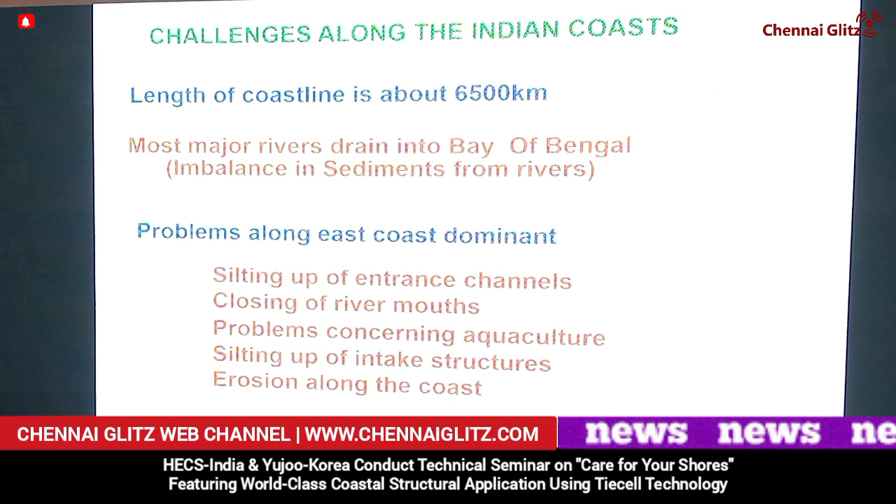The challenges along the Indian coast, and why India should care about it. As we know, on 3 sides we are covered by the seas, so it's important to talk about this. We have around 6,500 km plus coastline, and a lot of rivers terminate there, so complex activities go around, and imbalances occur because of the sediments that come from the rivers, causing dynamics and changes.

There are also problems concerning aquaculture - because of this kind of activity, challenges arise, along with siltation of the intake structures. Because of global challenges, a lot of intake structures are affected, along with erosion along the east coast.

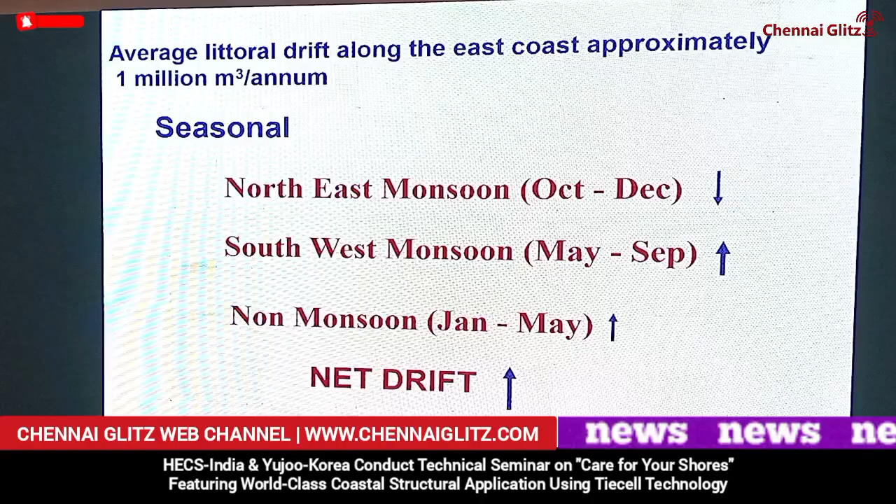So the net drift, if we see, is primarily happening, and it's always on a higher side. So on the various states, what are the lengths of coastline that we have?

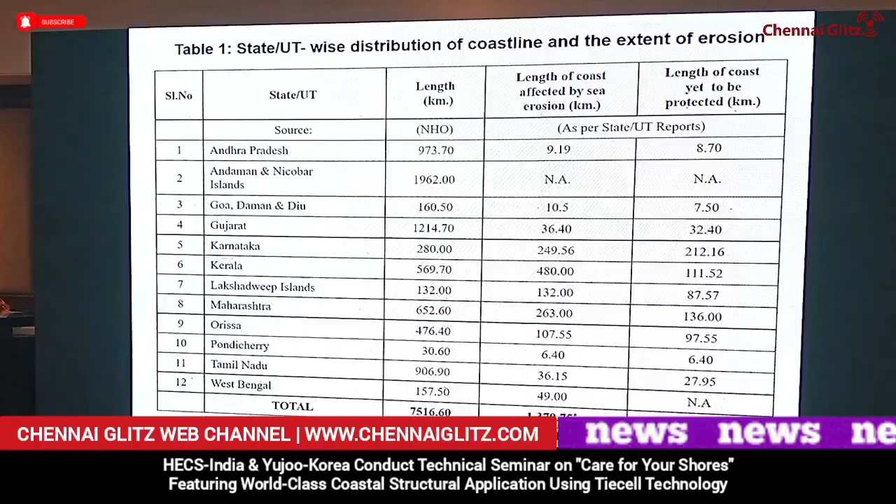Here we have a complete table wherein the length of coast affected by sea erosion is shown. If we see the total length, a significant portion of which is affected by sea erosion, there is a very interesting and challenging task ahead, because of human population growth.

So primarily we are focused on Tamil Nadu. If we see, there is 27.95 kilometers of stretch - the length of coast that has to be protected. So there's a lot of work to be done, not just with existing technologies, but with some innovative technologies that will reduce the impact on global activities.

Typical damages near the coast - when we generally put some kind of stats, people are not much aware of the actual scenario that is happening around. We have cyclones every year. Chennai also faces a lot of cyclones, and this is around different parts of the Indian coast.

What are the different existing technologies, and what innovative technologies do we look for, and how do we go forward? Primarily it all starts with some kind of design, testing, and real field implementation. We are interested in understanding the various design processes, the innovative technologies, and how we adapt to different site conditions.

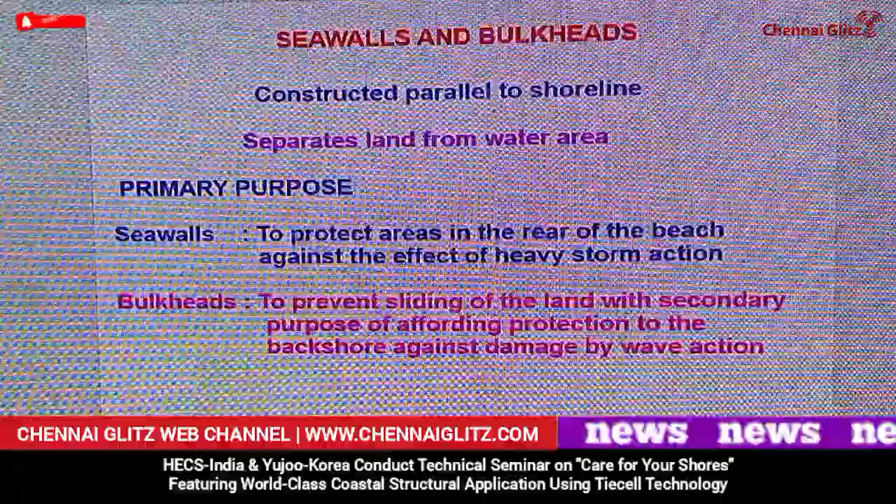With that as basis, things are moving forward in recent times. So instead of going for conventional breakwaters, I'm happy to see a lot of models that will be demonstrated or tested. Let's go to slide number 7 - what are the drawings coming out, and how it is all constructed. Depending on the water depth at that particular site, we come up with the solution that is required.

Yeah, I think this is, yeah. Now we can go to full screen, I guess it should be okay. Hey, what enable, okay, fine.

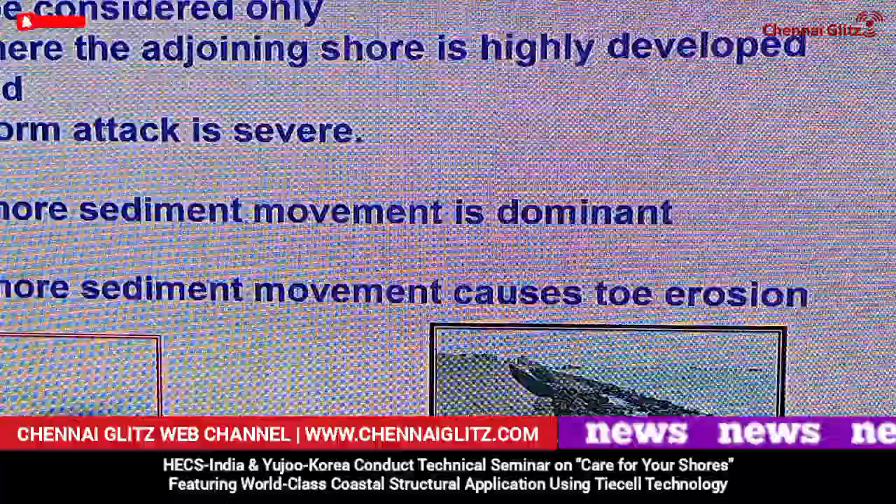So many of the places where erosion is of prime concern, seawalls have been put up - generally massive and expensive, and should be considered only where the adjoining shore is highly developed and the storm attack is very severe, and cross-shore sediment movement is dominant. There are two ways in which sediment transport happens: along the coast and also inward. Along-shore sediment transfer causes toe erosion.

Can you go to the next? Toe erosion is of prime concern, which basically destabilizes the situation. Experience in the west coast is viable in many pockets - different regions - while experience in the east coast is not viable in many locations. Some pictures of interest: the seawall at Puducherry, where you can see a proper slope coming out.

Some protection measures to avoid issues over a period of time, because all these things undergo - for example, all these things have a service life. So during the service life, how does it work? Based on the experience, some kind of a netted structure is also used.

There are two ways in which we generally do it: one is hard measures and the soft measures. Many of you might be aware of it. This is one of the soft measures wherein geotextile systems are used. The problem with this is that if somebody punctures it, there are chances of getting disturbed - that is the prime reason.

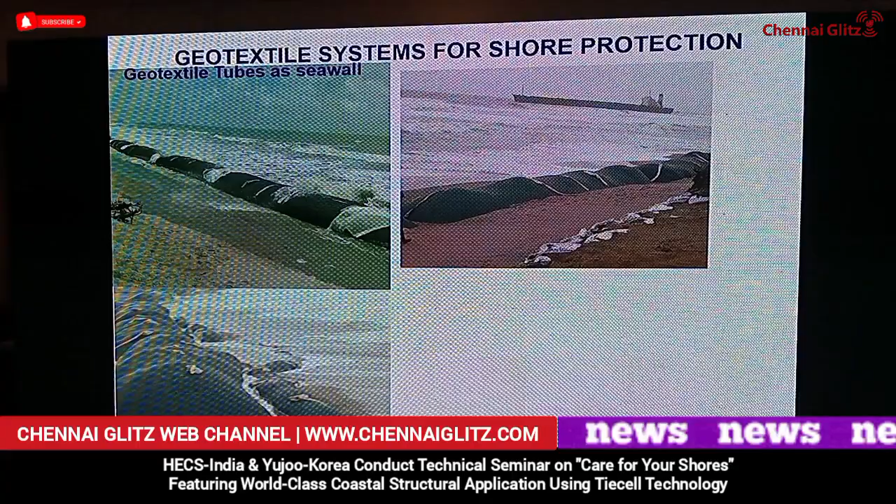Still at many locations it is not adopted, but these things are also coming up in combination with existing methods - geotextile in combination with some existing breakwater activities, like geotextile tubes as seawalls. So yes, here are some pictures of interest.

This is something many of us might have seen when we go outside - wherein apples have been put in some kind of a net. The similar concept is used where rocks have been well put up in some kind of a netted structure, and the primary focus is on keeping it intact.

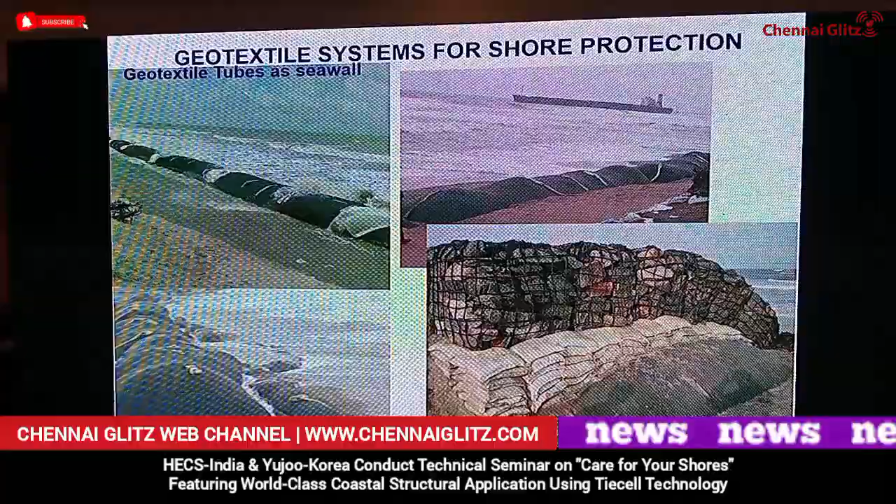You can see that over a period of time, how the construction of a seawall - but then because of the erosion that happens, there is a failure that is likely to happen in the future. So how do we mitigate it? That is our focus.

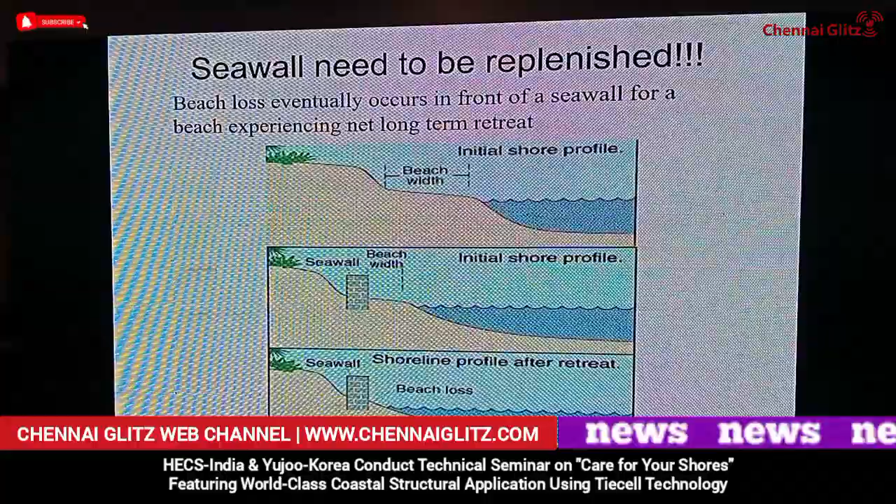The failures primarily, as we said, are due to extreme wave actions. So first we have to focus on what is the impact of waves and what are the site conditions, where we are putting it, what are the possible solutions generally adopted in the past, and how we are planning to move forward. Progressive failure from a locally weak point, overtopping and toe erosion, and force reduction techniques.

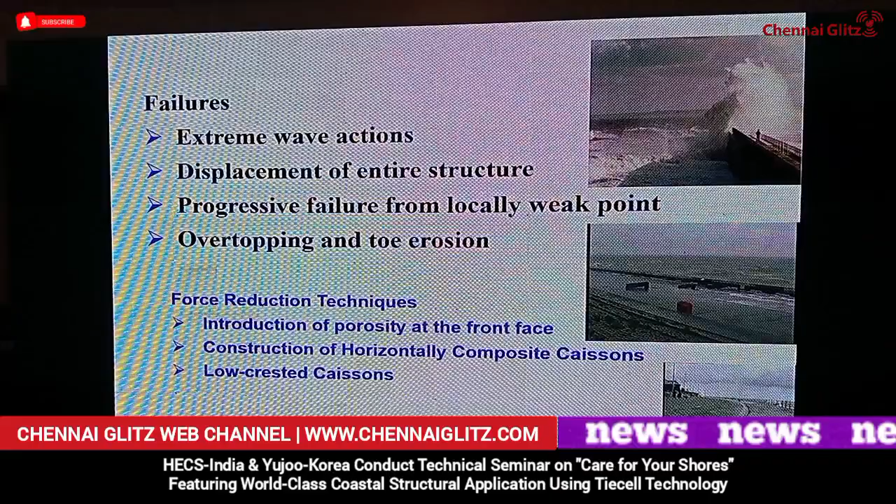This is where porosity starts switching in. The primary aim of any coastal protection structure is to dissipate waves, reduce the reflection, and also reduce the transmission in case of the place where it is intended to. Here are different pictures of interest - you can see that many of these structures come in combination with seawalls.

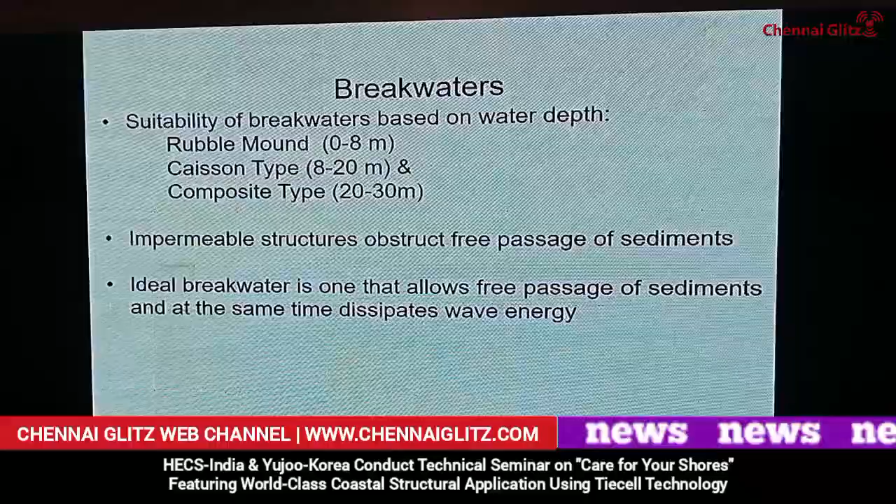So the breakwater, as said earlier, depends on the water depth, whether it is a smaller water depth or whether it is going to be increased, or it is going to be highly varying water depth. So the rubble mounds are chosen in this range, 0 to 8 meters, and above 8 meters is the type of breakwater wherein you deliberately construct some structures and put it on site, and composite type, wherein both of these things also pitch in.

Impermeable structures obstruct the free passage of sediments. That is a prime disadvantage of having this kind of structure. The ideal breakwater is the one that allows for free passage.

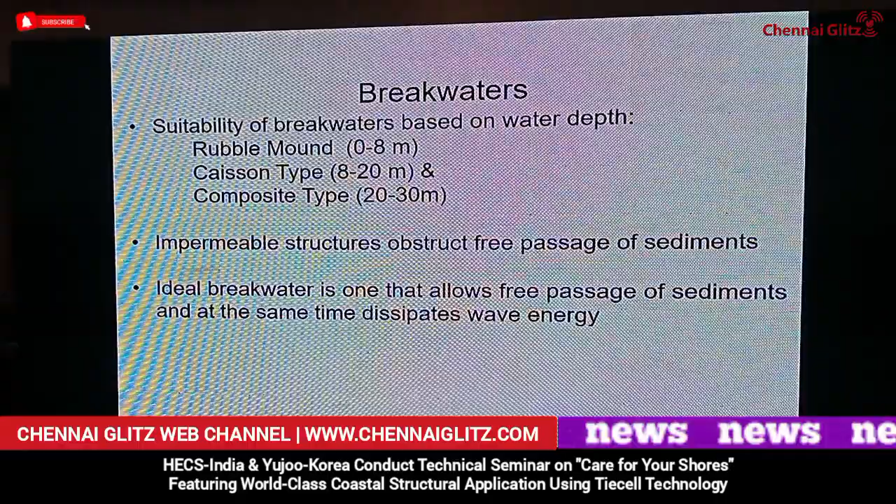So whenever I make any design, just like how you start a business, in this particular case, when we have a coast, the coast should not be getting disturbed, but then it should not get eroded as well. So how do we do it? That is the focus - there should be free passage of sediments, but then the energy dissipation or the impact of energy at that localized area should come down.

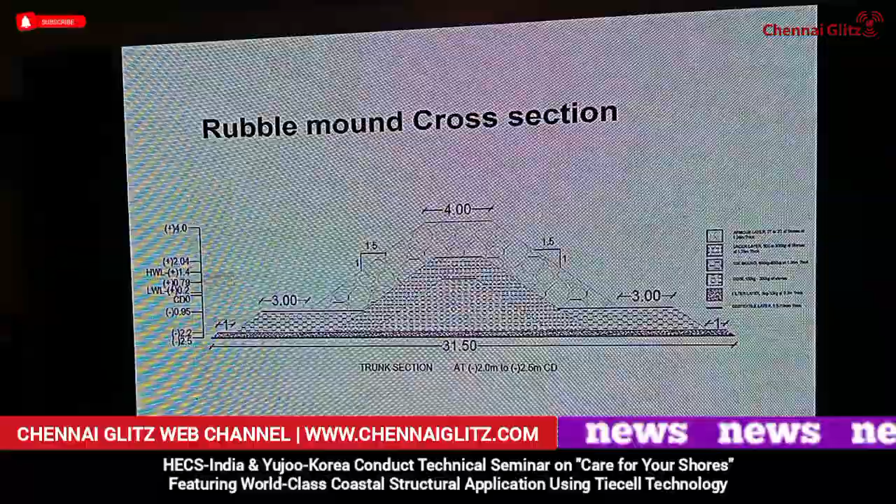So depending on that, we follow for all these activities - whatever we do has to comply with these standards. We have the Indian standards again. So all these things we take into consideration, and the slope is 1:1.5. This is the rough value, and it is not necessary to be the same on both sides.

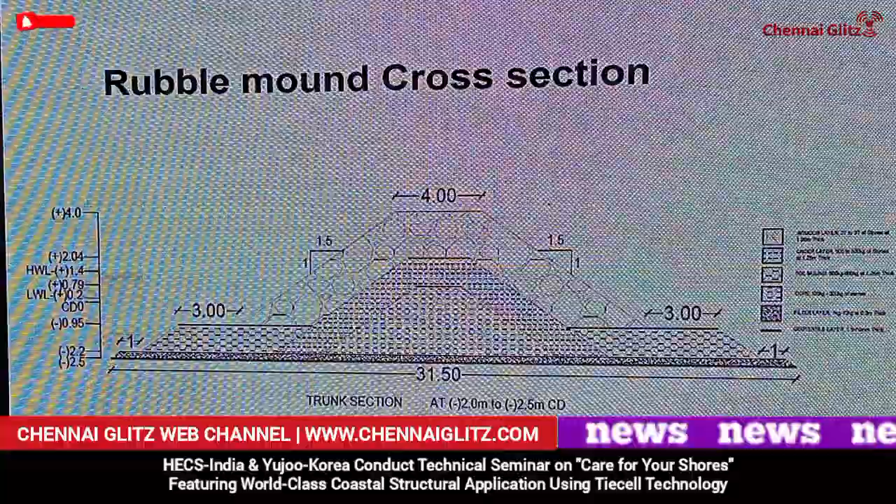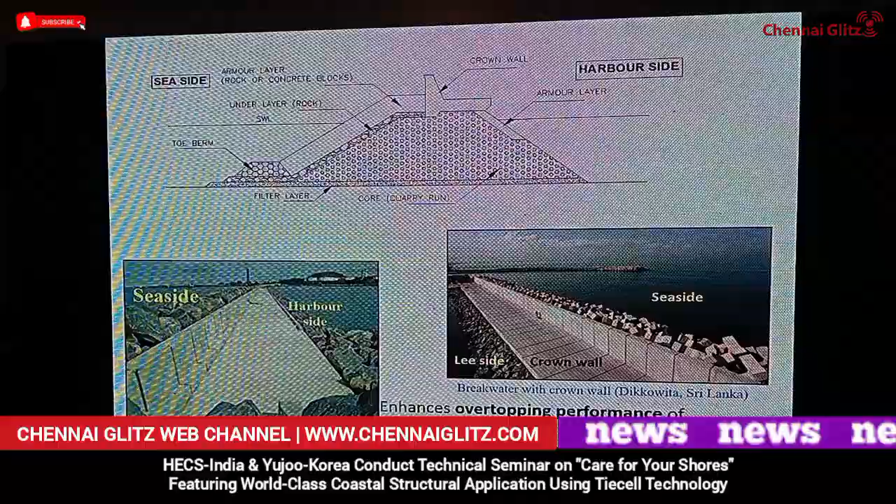One side we have the seaside, one side we have the harbour side. So depending on the requirement, the slopes are also adjusted, and accordingly the materials are also chosen. So here you can see how it is being put, and here you can see the seaside. Generally the slope on the seaside we have at 1:1.5, and similarly we try to have it on the harbour side. But again, many times we try to discuss with the client to see what is required and whether it is workable. We do model testing on our test facility and ensure it is fine.

So as said earlier, to improve the energy dissipation characteristics, is there any better way than the conventional rubble mound? That is where the widely used concrete armor unit comes in, wherein these things are precast at a site and brought to the location, and also different combinations come into picture - primarily they work on the basis of an interlocking mechanism.

They primarily go on to lock it, so it has been precisely placed. Each module has been precisely placed, and so over a period of time you can see how it has fared. This Accropode II - I have worked with this Accropode, and we happen to see there is not much difference between Accropode I and II, primarily except the projections that you happen to see. So primarily I think it is some kind of extension of their patented works.

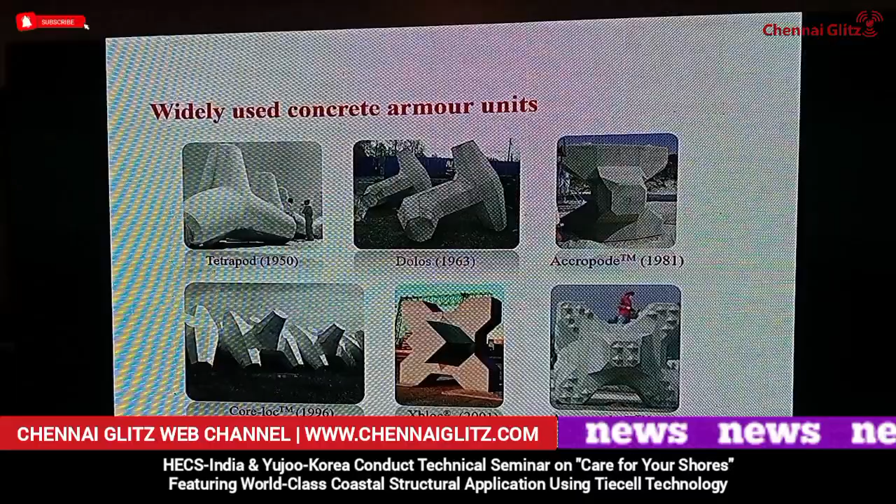So the pile supported breakwaters - this we recently also saw in Vietnam, wherein they have dedicated pipes over which the rubbles are put up. So I said the function of any breakwater is to dissipate the energy, to reduce the reflection and transmission.

So if you are able to construct a structure, if you are able to come up with some kind of a module that will do these kinds of activities, wherein the energy dissipation is very high, reflection is less, and also the transmission is less - if it is able to do this, then it is a very good coastal protection structure. And these are some of the places where it has come up. The idea is each one has their own advantages.

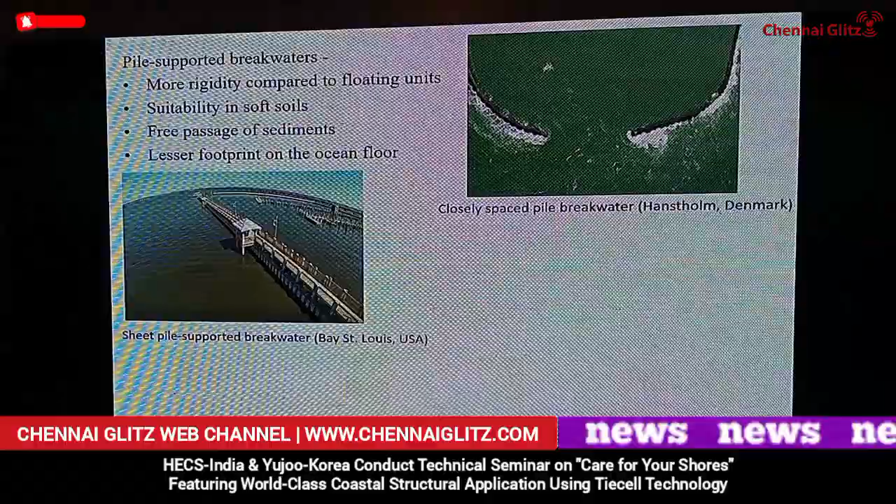As I said, the pile breakwater has been deliberately put up, and the good thing is that you don't need a lot of material for working with pile breakwaters, right? So you have a reduced area wherein you deliberately put the rocks between your piles, wherein the combination of both the rocks and the piles are used. So lesser footprint, as said, that's what we are talking about, and also the free passage of sediments.

So recently we are also trying to work with piles, wherein instead of having the rubbles, as you know, the energy concentration is more on the sea surface.

For example, when you jump in a pool, much of the time you see the waves hitting only on your interaction or interface region. So how do we dissipate the energy which is at the sea surface, but not required throughout the water depth? For example, in 8 meters water depth, you don't need to put so much volume of material. You need the volume of material closer to the sea surface and reduced material below. So how do we do it?

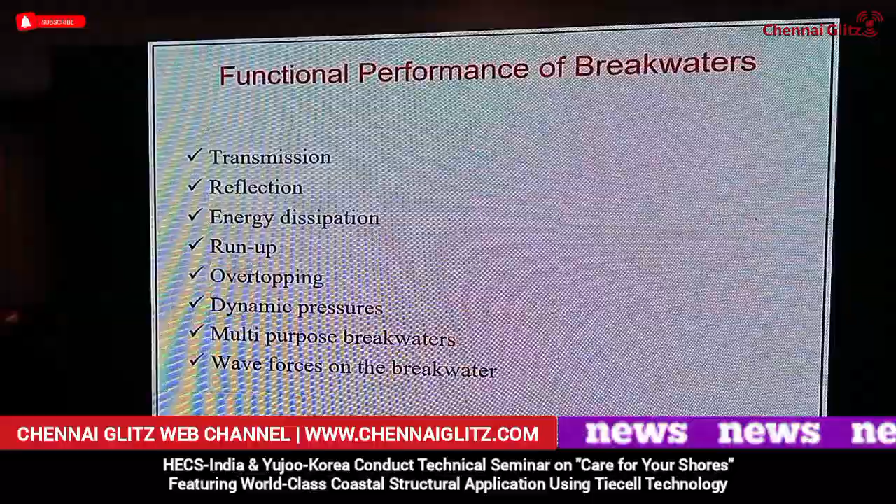I'm pretty sure these models, and also the discussion with you people, will elevate us. So as the function of breakwaters, the transmission, reflection—the transmission is prime, for example if you are putting it primarily for the construction of your port and other things, the transmission should be lesser than 0.5. That's a rough number, but we generally tend to keep it such that if it is less than 0.5, it is meeting its needs.

And reflection, as said, the energy dissipation has to be very high. So much of the time we put up the theoretical front, and we try to do either laboratory testing or numerical modeling, combine them, and verify it—and also the run-up. Run-up, when we say it, is primarily when the wave impinges on the structure, moves on the structure, and how much it tries to climb up. That is what we call the run-up.

So what if the run-up is very high, higher than the projected area—which means it will overtop. So primarily all these things are linked, along with dynamic pressures, and over a period of time how does it build up as well.

Multi-purpose breakwaters is a very important area wherein we are trying to come up with some kind of wave energy converters integrated into the breakwaters. That is a project we are also working on, wherein instead of deliberately or intentionally constructing some structure in the sea to support your wave energy converter, you mount it on your breakwater. So if you are constructing your breakwater, make it very good such that it will also support the wave energy converter. That is the focus.

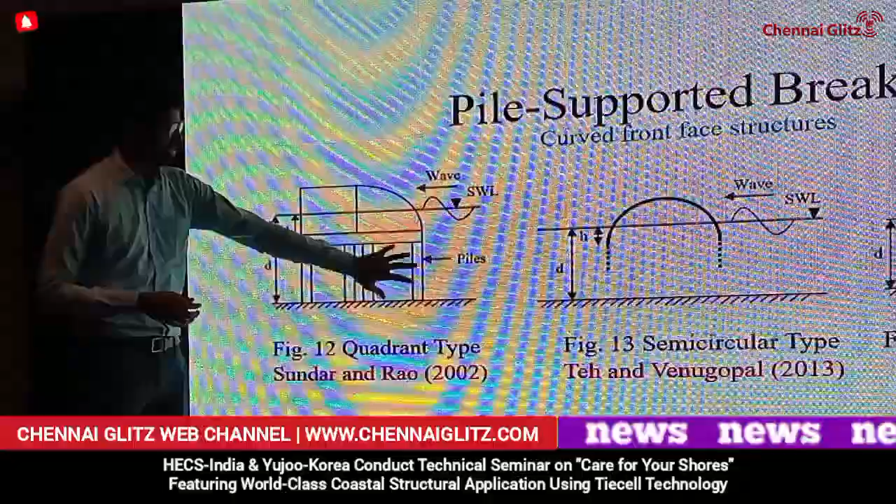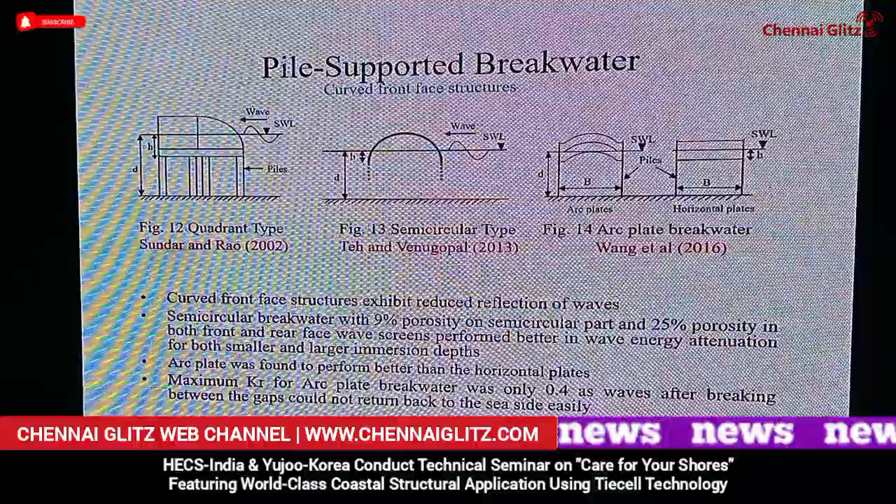So, pile supported breakwater. As said, the primary focus is on reducing the volume of material here. We have the pile, and much of the structure is just here. We also have some kind of a porous structure, primarily aimed at increasing the energy dissipation—primarily increasing the vorticity that is happening at the initial region, or the interaction zone.

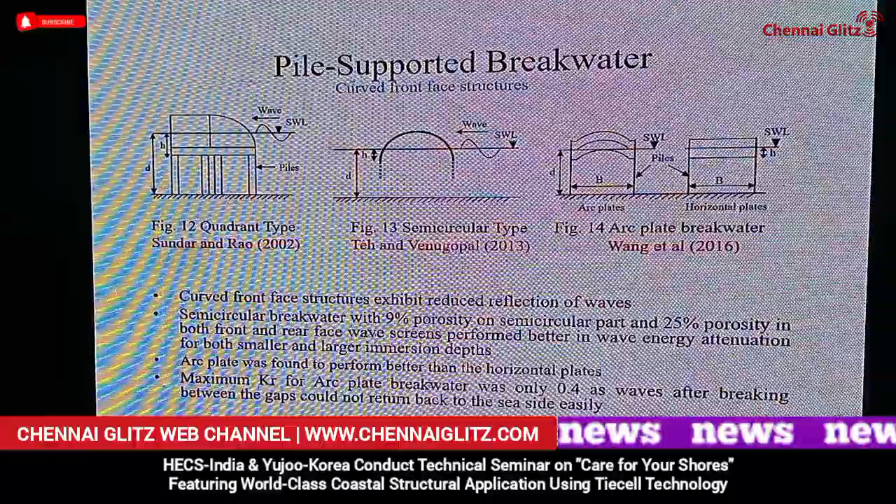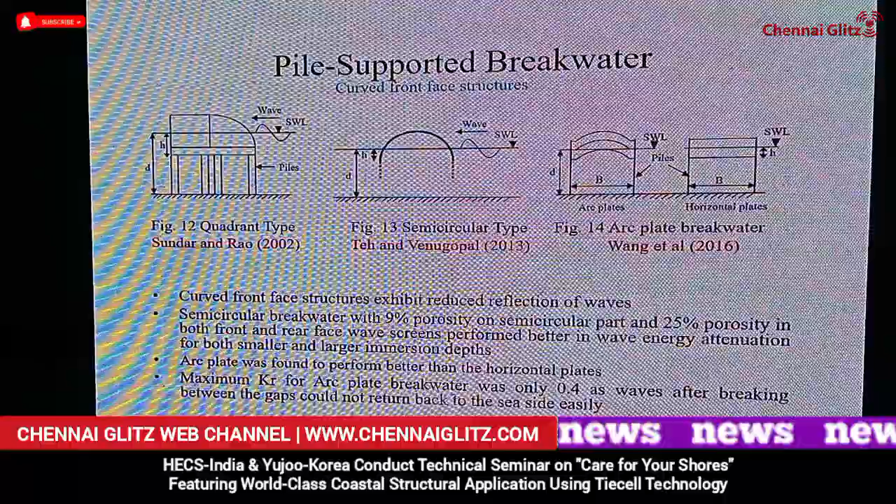There always exist a lot of variety combinations, and we can also propose something to come out, and if it works in different sea states, then I think it is good to go. The curved front face structures exhibit reduced reflection of waves—arc plates were found to be better than horizontal plates. This is something we are also recently trying to work with, some kind of a funnel shaped structure, wherein the wave energy converters also can be mounted.

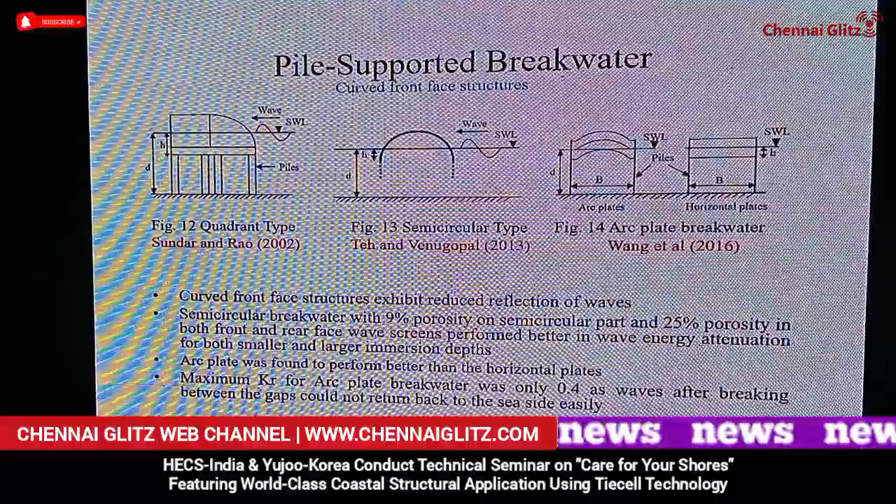So all these things revolve around the return on investment. If you see it as a client, what they want is: I invest this much money, how do I get it back, and how does it solve the purpose? With this as a basis, if we are able to think beyond, it will be very great.

The new concept of pile supported breakwater with berthing facility, as said, along with your berthing facility, some kind of structure—for example, the OWC energy conversion, and also the heaving buoy. That is the one I am presently working on, and it is very interesting.

The problem with all these wave energy converters is the efficiency. Generally, if you see the hydrodynamic efficiency, it is very high, but finally at the end we happen to get only 15 to 20%—reduced efficiency. So we are trying to push that, but there are other ways in which you can compensate.

The amount of investment that you do—having a reduced amount of investment while also trying to maximize the energy capturing. That is the thought process.

In this case, Sundar has put an OWC device mounted on piles. That is some of the studies they have been working on.

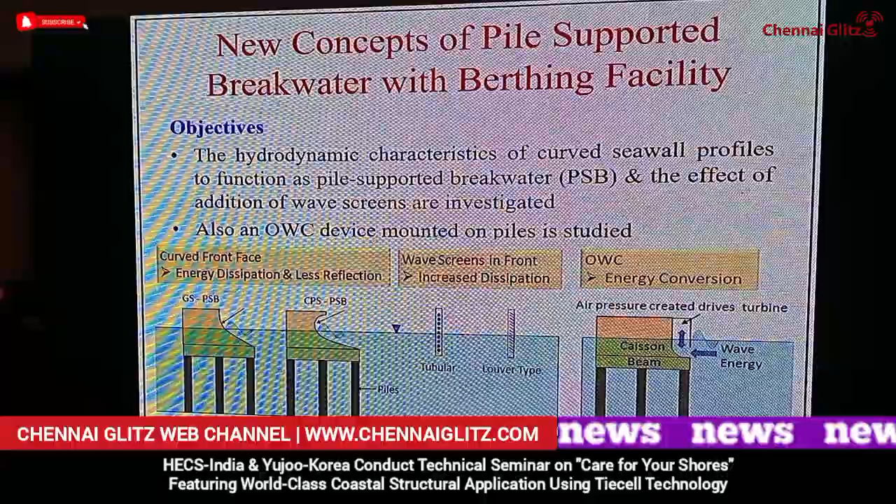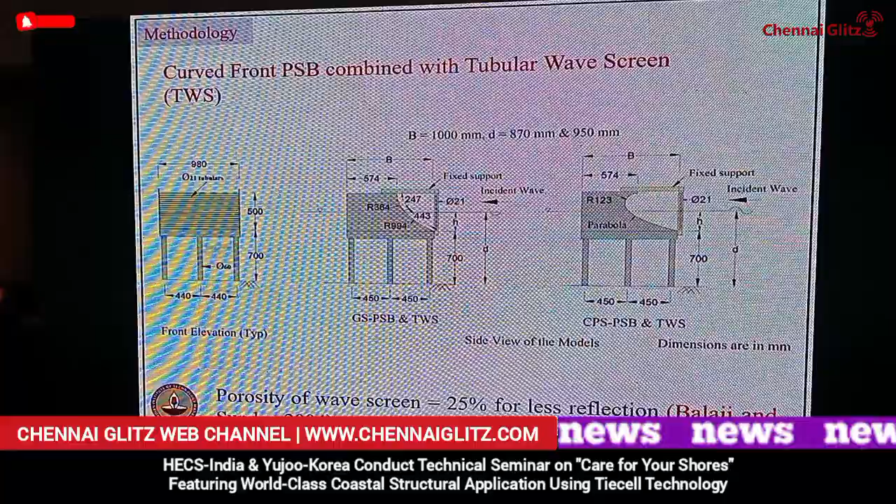You can see a lot of tubular structures here, and I saw a couple of experiments worked out in this area, primarily focused on energy dissipation. We try to create turbulence at the interaction zone, where the energy dissipation happens very high, and that just solves your purpose.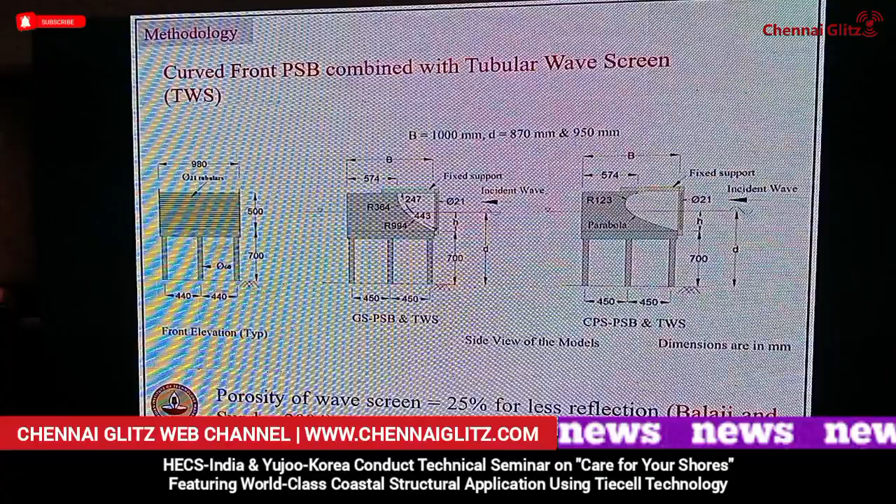We also measure the forces that come and the moment that comes at your pile or board.

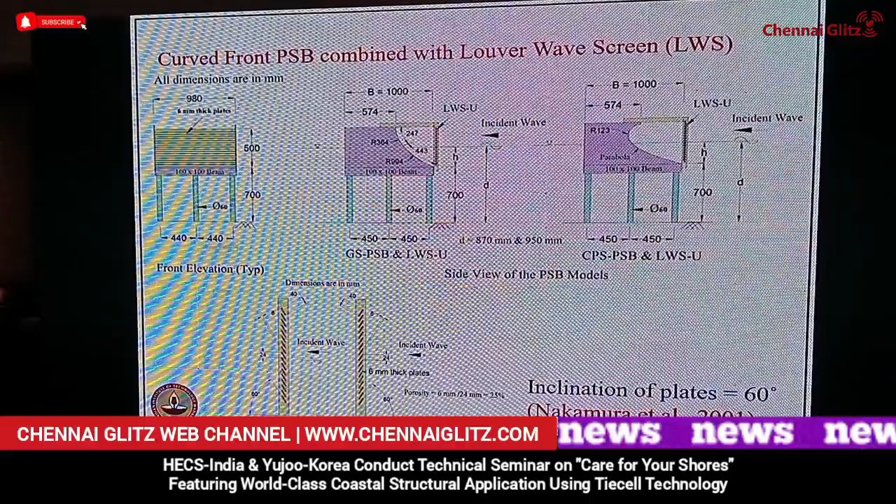When it comes to the methodology, we generally don't get into experiments right at the front—that's the way it works for any kind of project. We first do a lot of numerical investigations. Once we zoom in on a couple of ideas that prove to be very promising, then we venture on to do the experiment.

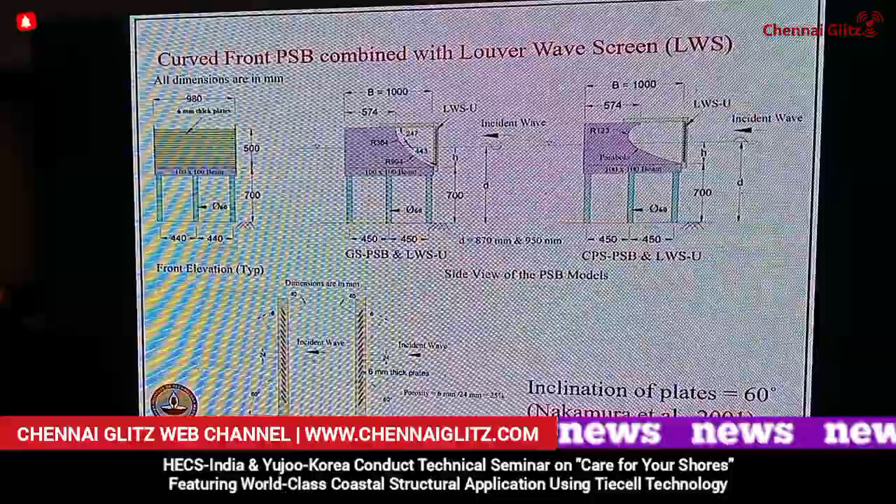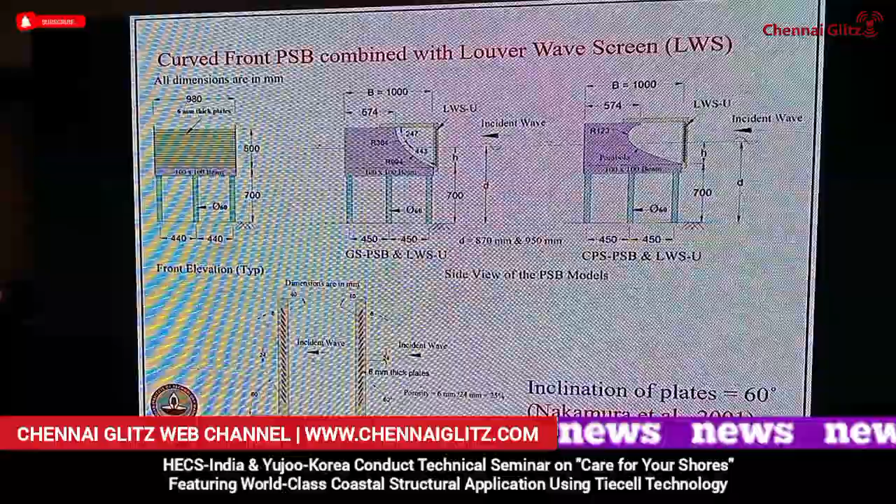Experimentation is a very costly business the moment you touch it—starting from acquiring the facility, the materials required, and also the manpower to do the experiment. All these things are very costly. So before we get into this, we do extensive numerical modeling, then we go on to do experiments only for a selected few.

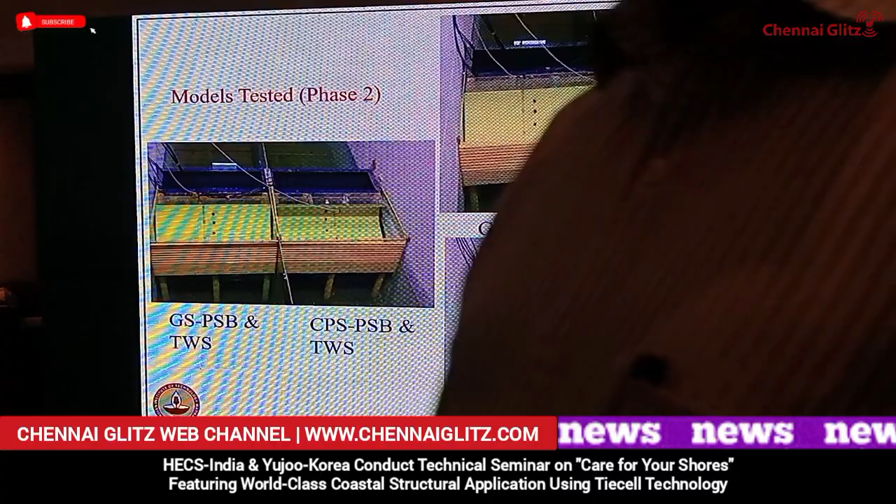Here are some of the experiments done in our facility. Many times we also divide our facility to do two testings at a particular time, which helps us understand for a given time how one structure performs and how the other structure behaves simultaneously. Much of the time we are focused on getting the reflection, the transmission, and also the forces that come on the structure.

If you are going to integrate it with some kind of wave energy device, how are we going to measure it—whether it's a heaving buoy or a trapped zone concept like the OWCs?

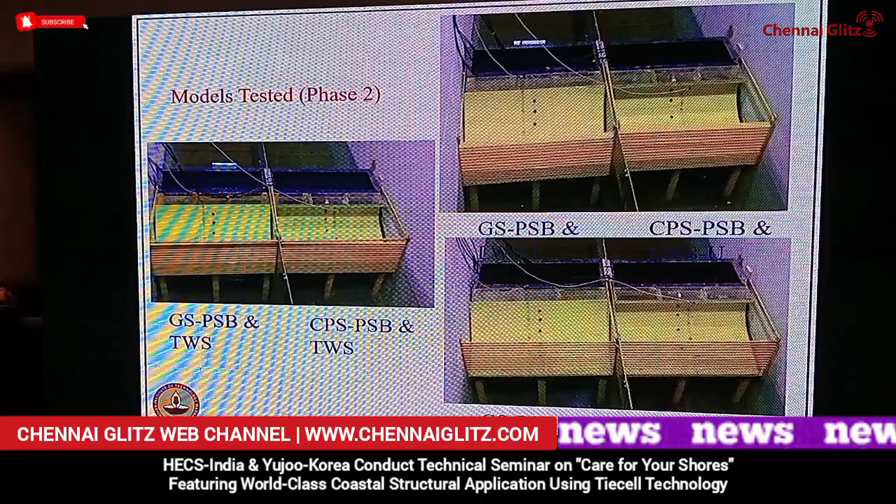For overtopping, how we generally do it in our lab is primarily with some kind of collecting tray, where for a given wave, we measure how much amount of water overtops the structure and collect it. Based on that, we project—say at 1:40 scale or 1:30 scale—this much will be the volume of water overtopped, and this will cause the damage. That's how we do it on the experimental front.

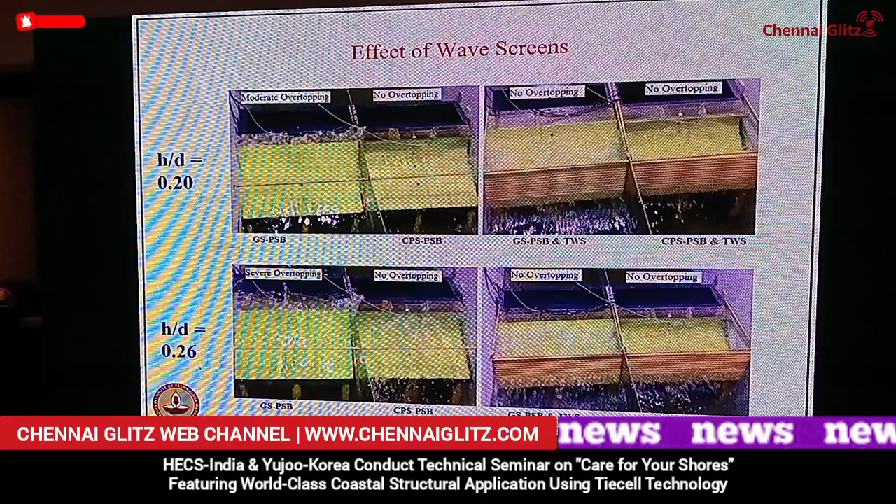These are some stages of experiments and how it is done, and we also have some staple types. Many of the concepts you see here you might have come across elsewhere—it's all about trying to integrate and work them out.

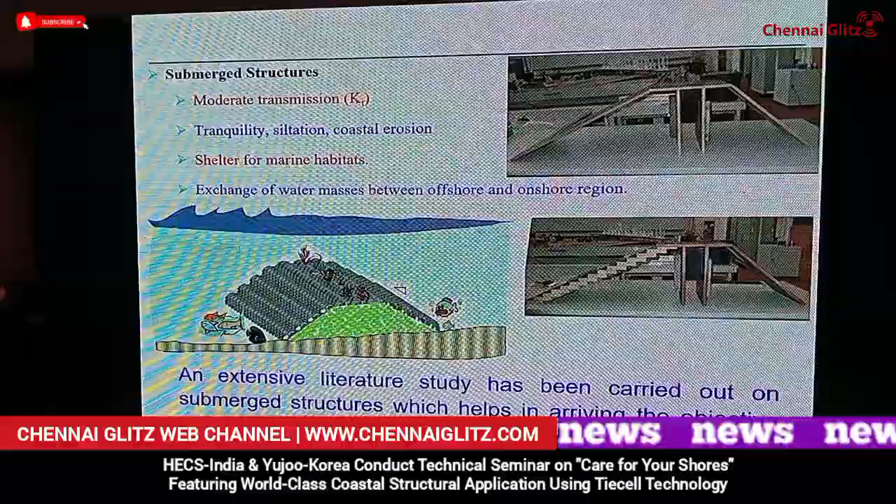Moderate transmission, tranquility—tranquility is a word primarily used for any breakwater. The primary function of your breakwater should be to create a tranquil zone, a shelter for marine habitats, and to allow exchange of water masses.

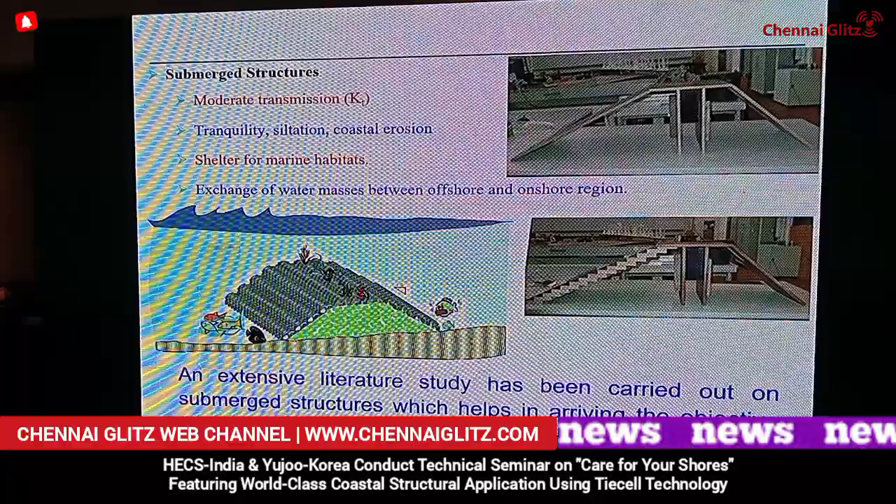Some places deliberately add some kind of reef—for example, in the Lakshadweep Islands, IIT Madras has given the design and deployed a lot of artificial reefs, primarily aiming to increase marine habitats and enable exchange of water masses between offshore and onshore regions.

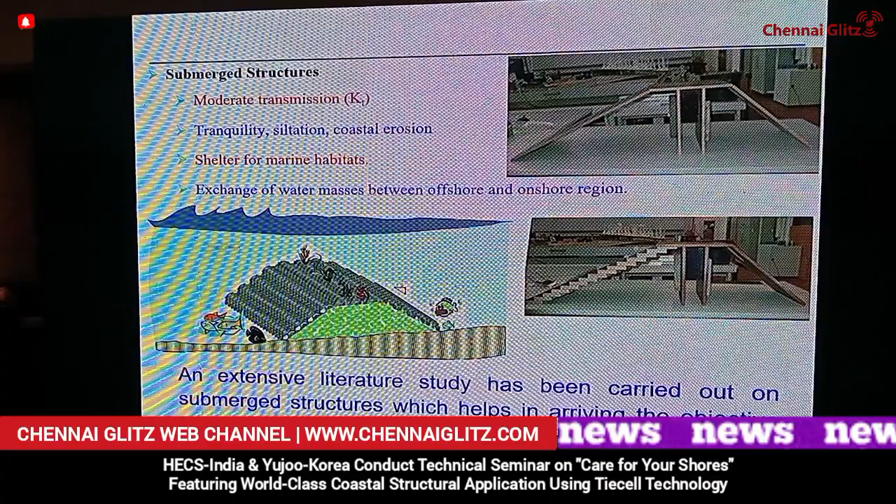This is one model that has been attempted before, and this is what we see in Lakshadweep. If you Google 'IIT Madras efforts on Lakshadweep marine habitat,' you can see a lot of the real field implementations as well.

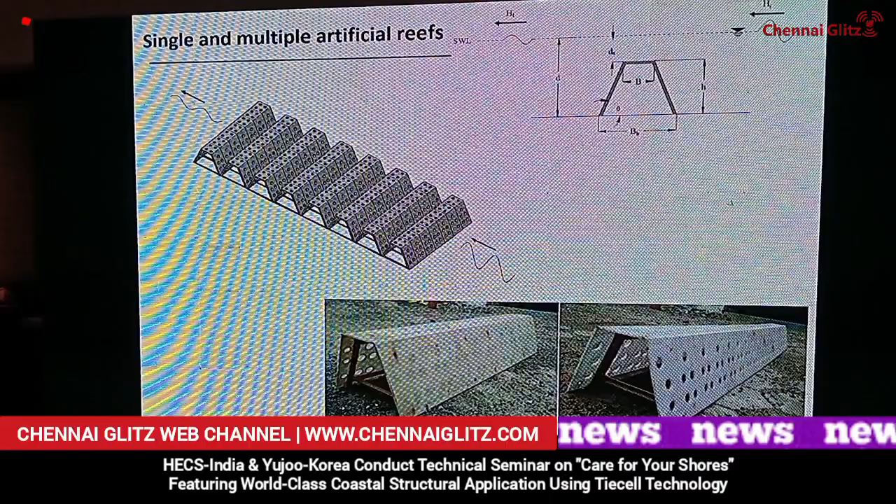Depending on the requirement, we cannot give a direct solution. The first thing is we sit with the client to discuss what they actually want, and for a given site, what the previous work has been. We always take lessons from previous activities, and based on those with present technology, figure out how to do better. That, in a nutshell, is how things are progressing at IIT Madras.

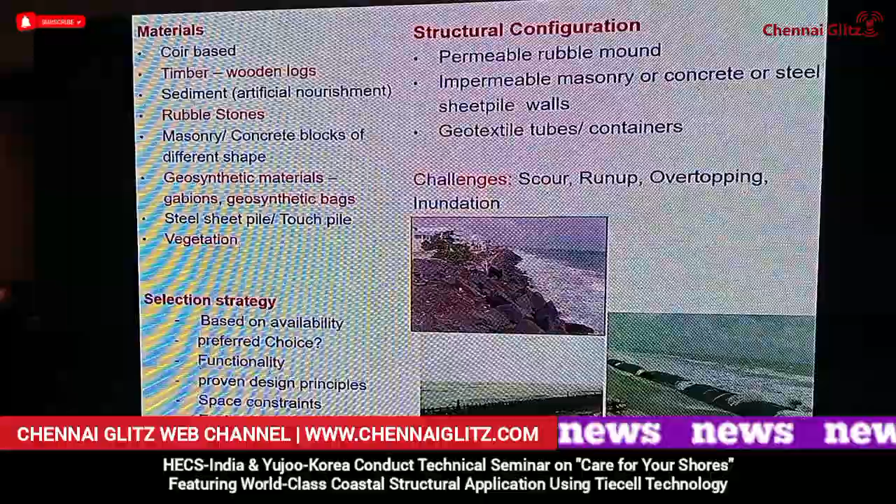Some of the different items that come into the picture have been put up—the structural configuration, the permeable rubble mound, the impermeable structure. The problem with impermeable structures is that they do not help in dissipating energy, but again, it depends on the type of configuration you have.

So if you have some kind of intricate shape, then of course it does its business. So geotextile tubes as well.

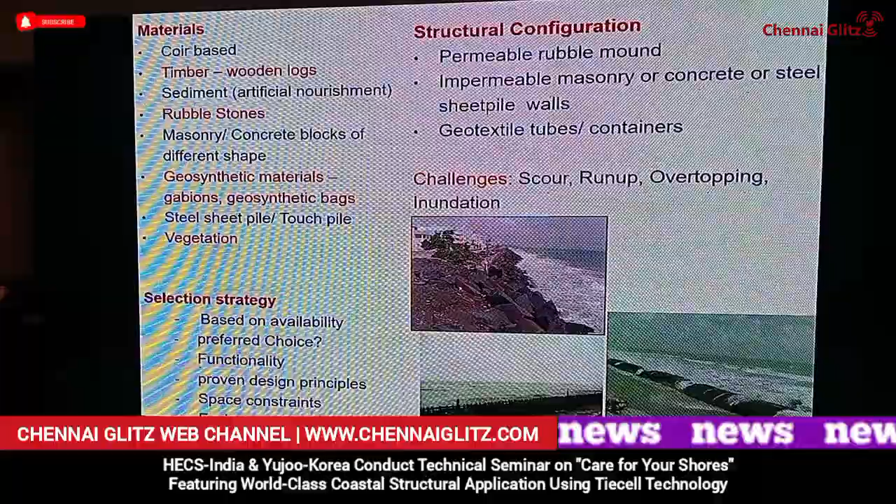The challenges are the scour, the run-up, overtopping, and inundation. The selection strategy is based on availability, preferred choice and functionality, what it has to do, and the proven design principles. For all these things, that is why we do model testing as a primary activity.

When going for real field implementation, model testing is of prime importance. Space constraints and the environment matter too, so it should not impact the environment. Recently, CWPRS in Pune has been coming up with using ash as a material for constructing structures. Some people don't want it, so we take it as an input and figure out how to make use of it. That is also a thought process.

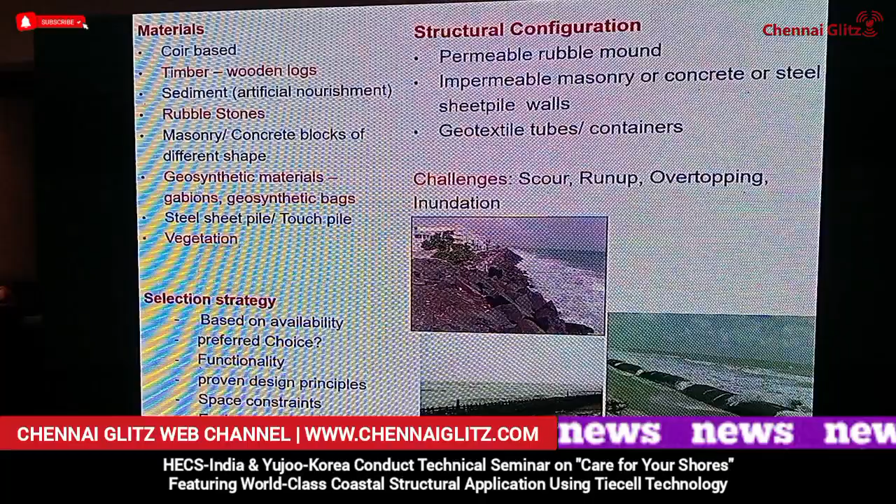Innovations in coastal structures means a non-traditional approach in construction method, material, configuration, shape, concept, or device that has a sound engineering basis. Whatever we do, extensive work has to be done at laboratory scale and also at the numerical strength before we put it up in the real field.

Improved current methods include low height, broad-crested structures, alternative structural forms, and interlocking. Tetrapods, tripods, hexapods all work on the concept of interlocking. They help each other and stay intact and in place, just like a chain, all interlocked together. So the same process: interlocking and alternative materials.

We said any other materials with which we can work out, geosynthetics, use of vegetation, and other bioengineered approaches. These are some of the ways in which we can bring innovation into coastal protection structures and how we get better.

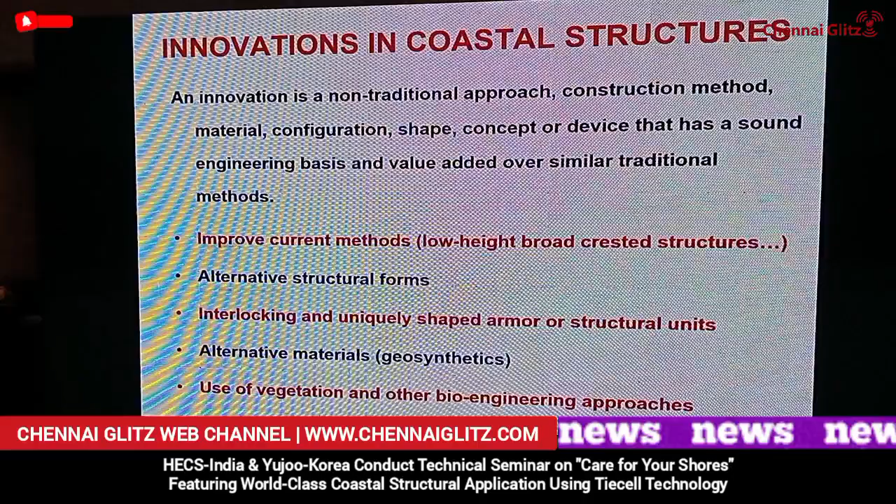The problems in the near coast are dynamic and never end. As long as the human population exists and we focus on protection, it is always dynamic, so we have to change with the changes and figure out how to work with it.

We make some shoreline changes, for example in the Tamil Nadu region, and that will also have an impact on other parts. Over a period of time, you see erosion happening at one particular region and accretion at another. For example, the Pulicat region is a focus case.

If there is good water exchange, primarily we are talking about that. First thing is we tend to see why it has come about, why it has happened, and what is the way in which you can make it better, for example having a clear entrance.

This could also possibly be because of reduced water exchange at that region, because of which minerals at that particular region may have continued to settle over time, along with some wastage being there at that location. It's like having a body where you need a certain inflow for the outflow as well. It has to be worked out by understanding the dynamics at that region and studying what has caused it and how to bring it back in place. A lot of effort has to be taken.